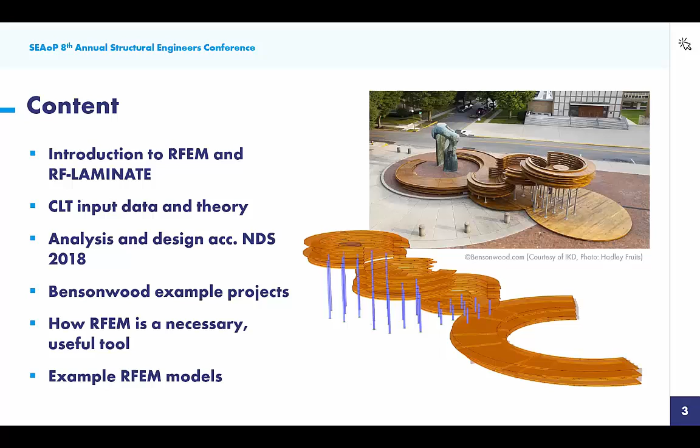I'll go through the CLT input data as well as some of the theory behind it, and we'll be running a quick analysis and design according to the NDS 2018. Then I'll turn it over to Florian, an engineer at Bensonwood, to show you real world applications of cross-laminated timber and mass timber with some example projects they've worked on. He'll talk about how they found RFEM to be a necessary and useful tool in these projects, and go through a few example RFEM models as well.

So I am going to go ahead and begin within our program RFEM. This is the main structural analysis program, RFEM. It will provide a full analysis, so we're talking internal forces, deflection, support reactions. We also work with this add-on module concept to provide design of our elements, and today we'll be looking at RF-LAMINATE, which provides design of cross-laminated timber.

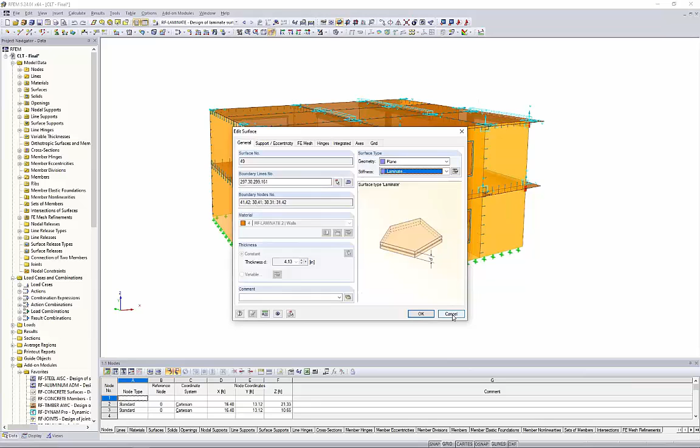For the sake of time, I've already modeled a two-story structure here, and you'll notice several surfaces. If I double click on one of these surfaces, the stiffness type is set to laminate, referring to our RF-LAMINATE add-on module, which we'll get into in a minute on how we can accurately calculate the stiffness properties of CLT panels. I've also combined this with member elements, so you'll see glulam beams dropped down below the bottom of the surfaces for additional support, as well as some glulam columns, all within the same project.

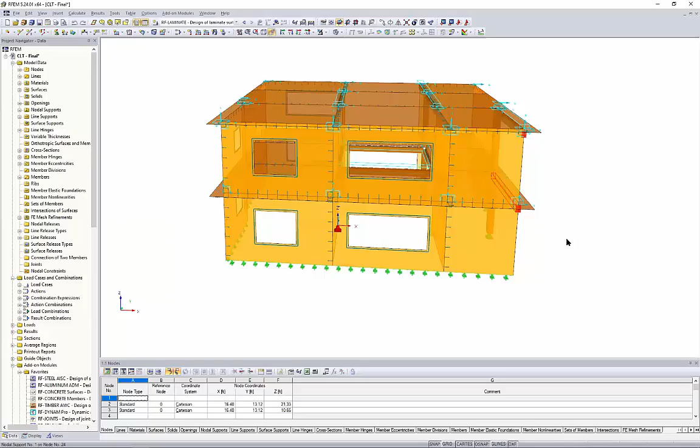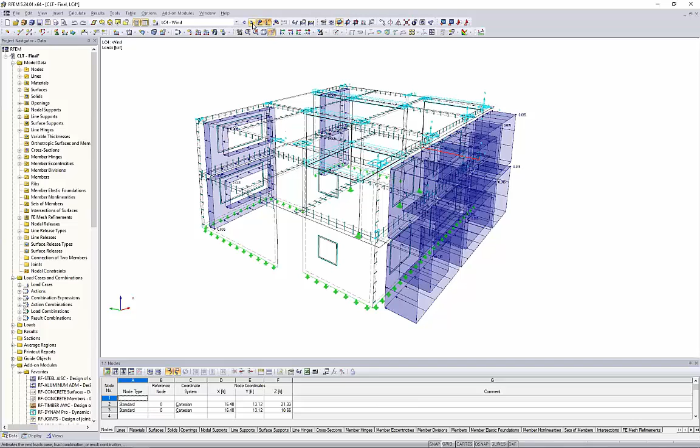I've also applied loads to this structure. These are just general surface loads. If I turn this to wireframe, it's a little easier to see. We have a dead load applied to the first level and the roof level, a live load, a simple snow load again applied at that roof level, and then a lateral wind load. I went ahead and combined all these load cases into load combinations according to ASCE 7. When we display these together, you'll see these gravity loads in addition to lateral loads acting on the structure altogether.

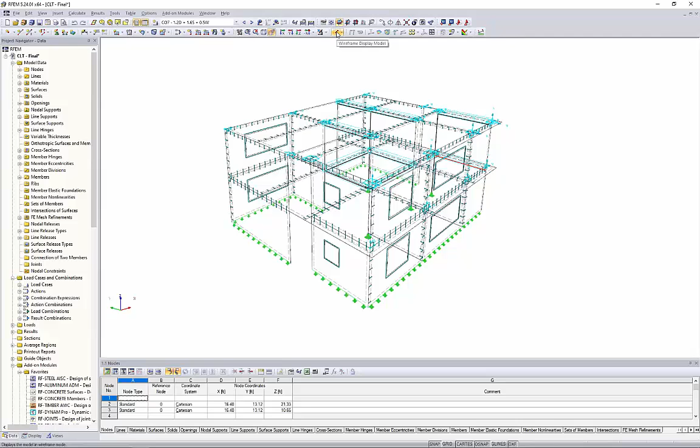Before we run this initial calculation, what's required is to define the correct stiffness types for our cross-laminated timber, and for this we'd utilize the add-on module RF-LAMINATE. I can access RF-LAMINATE within my project navigator on the left. When I say add-on module, it's really nothing more than this dialog box that pops up within our main program. So before I give you a quick tour, let's jump back to the PowerPoint to see what's happening behind the scenes with this add-on module, how it's working with RFEM, the main program.

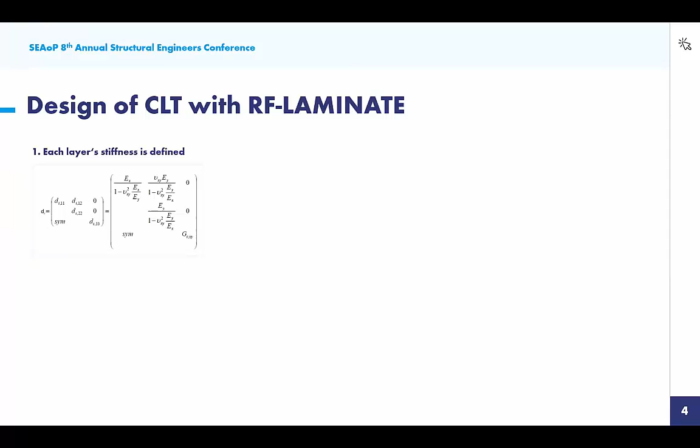We know with cross-laminated timber that this involves individual layers oriented 90 degrees to each other, and each individual layer has its own stiffness properties - modulus of elasticity, shear modulus. In turn, these individual layers have their own stiffness matrix as well. This is what we'll eventually be defining within RF-LAMINATE - these individual layers. What we do with these individual layers is create this overall panel, and what's required for this panel, which might be used for a wall or floor element, is to generate the overall stiffness matrix - what we call the global stiffness matrix of this panel.

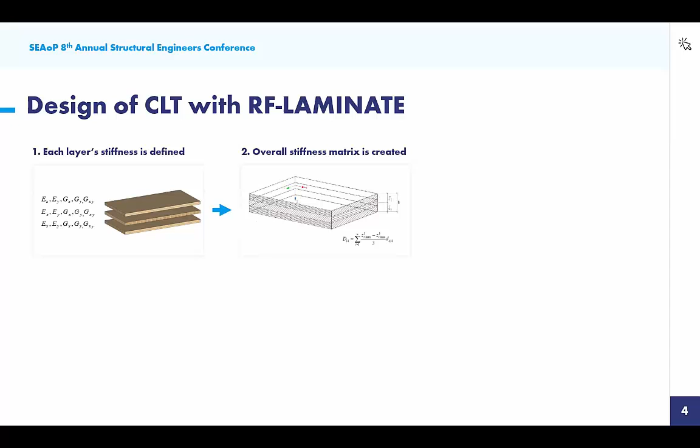RF-LAMINATE will automatically do this in the background with what's called the laminate theory. So you might see here a sample calculation for the D11 entry of that stiffness matrix.

We take this global stiffness matrix and export it from the add-on module back into RFEM, for that structure we were just viewing. Then we can go ahead and run the analysis, which includes the dead load, live load, wind, and snow load. After running this analysis, we get internal forces for each one of these CLT panels.

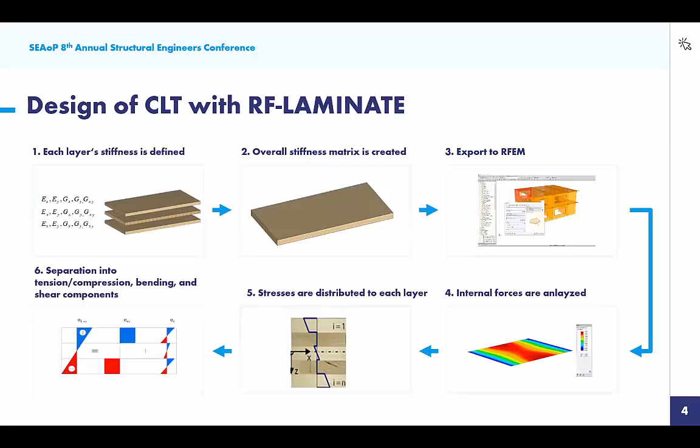These stresses from the analysis are ultimately what we're comparing with our design stresses, or our limiting stresses, based on the material as well as the NDS code. From this, we finally get a design ratio for our CLT panel. So that's kind of what's going on in the background here.

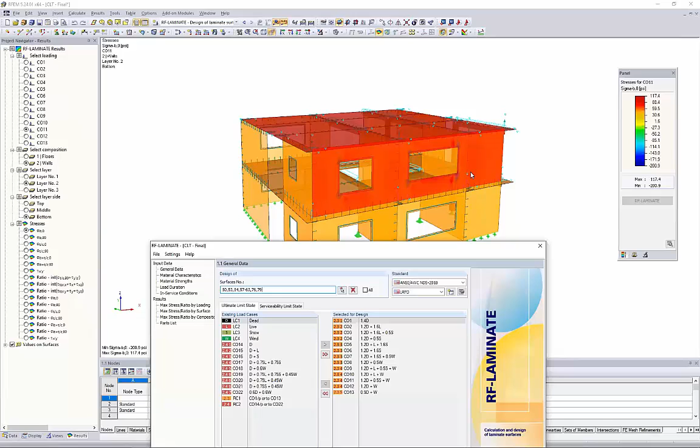Jumping back to RFEM, just to give a quick tour of what this add-on module requires for input, you can see that I can choose the surfaces I'd like for design. Currently I've only selected the roof panels here as well as 3 wall panels, but we could design all at once if we wanted to.

Over on the right-hand side, we're going to choose our design standard. You can see the NDS - we know recently the NDS has added CLT design with the 2015 standard, and we also have the 2018 standard. We have the Canadian standards, since that was recently implemented there, and then of course the Eurocode.

For the ultimate limit state design, we would likely move our LRFD load combinations over here to the right, simply because I'm choosing the design method according to the LRFD. Notice the ASD is also available here.

We can also check serviceability for these panels - we're talking deflection checks, and I'll show you a little later where we can set that limiting deflection ratio. For this simple example today I'm not doing deflection checks, but we'd probably move these unfactored ASD load combinations over to the right-hand side.

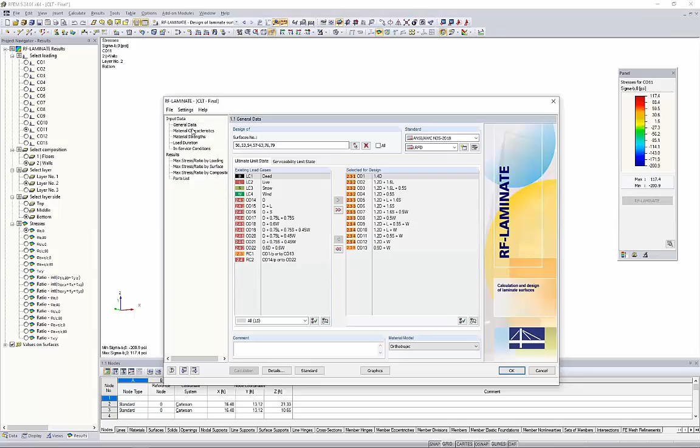It's really as easy as moving down these tables from top to bottom. So we'll take a look at this next table, material characteristics, and this relates back to the PowerPoint model of where we're defining these individual layers for our CLT panel.

For the first layer, we can access our material database and use our filters on the left to filter to timber. We might choose North America, and the NDS 2018, and here's about every single timber material available within the standard, along with all of the relevant material properties. You can use these search functions if you need to as well.

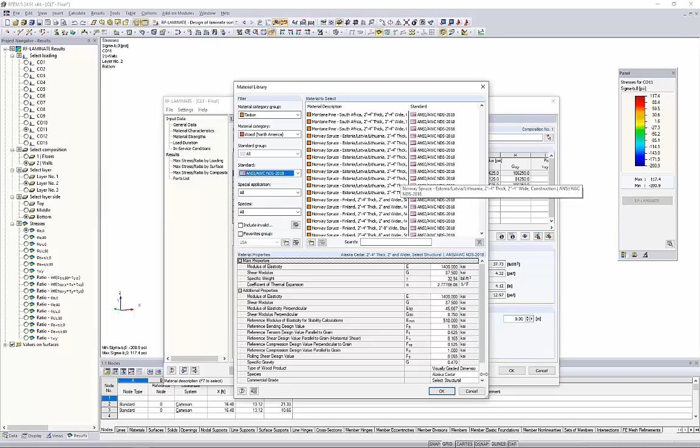Once you've determined what the material is for that first layer, we would select it. You'd want to input the thickness, and notice in this third column is the orthotropic direction - 0 degrees, 90 degrees, 0 degrees, and so on. That's the definition of CLT, orienting those layers 90 degrees from each other. Then we get the modulus of elasticity and the shear modulus automatically brought in from that material property database.

We'd continue to do so for our additional layers, and this might be for a custom layup, a custom type CLT composition. We could save these layers so we can always use them in a future project for mass timber within RFEM. The other option is to import the layers from the library.

Within this option you can see a drop-down box of various manufacturers. For CLT from the North American market, some names that might sound familiar are Nordic Structures, Smart Lam, Structurlam, and then we just have the general PRG 320. For example purposes, we might move forward with PRG 320 CLT according to the US.

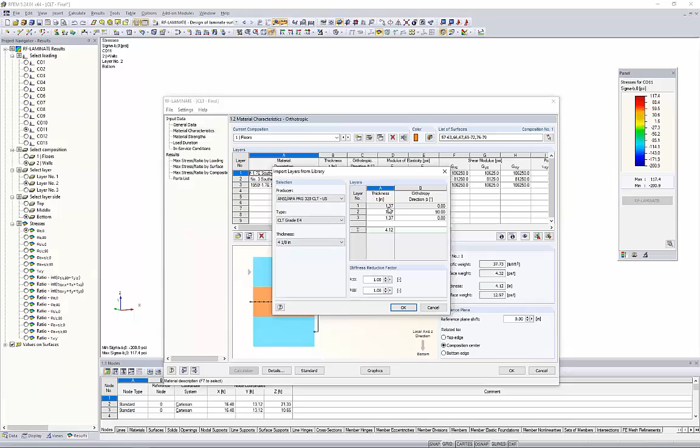So once we select our manufacturer, we would choose our grade from the drop-down, then choose our thickness, which influences the number of layers for our CLT panel. Notice the layers are automatically brought in, including the thicknesses and directions. When we import that in, this entire table is filled out for us based on the manufacturer's products. So that's just another option if you see your manufacturer in there. Otherwise, you can create custom layups and save them to your library.

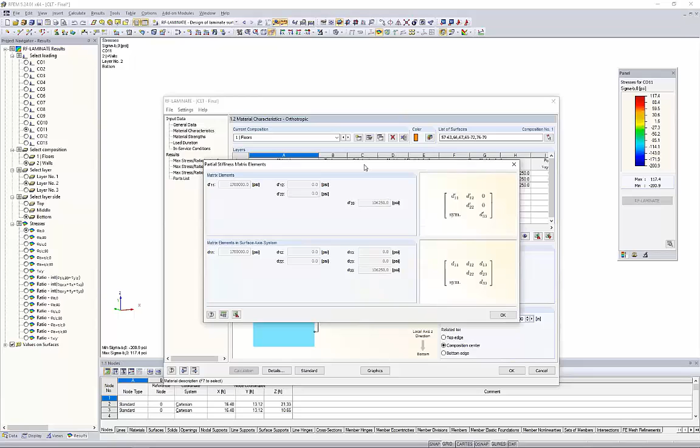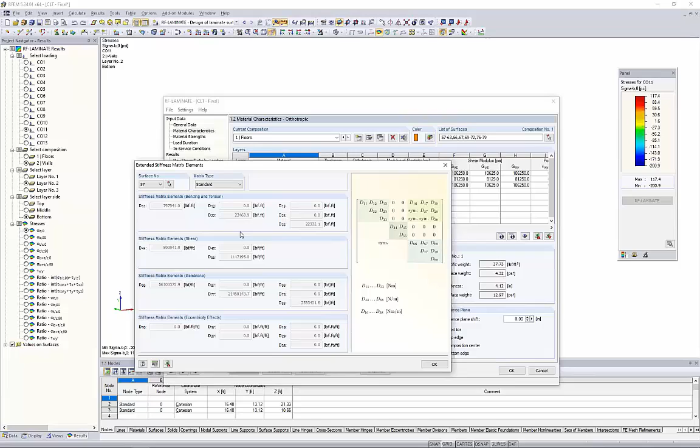Now, relating back to the PowerPoint, each one of these individual layers has its own stiffness matrix, so we can view the individual stiffness matrix here for that single layer. The program takes it a step further and calculates this global stiffness matrix for our panel. If you're not using a program where you can individually define these layers, you'll need to put the global stiffness matrix into your relevant FEA program. This might be something you get from the manufacturer, but ultimately this is the information we need to export back out to RFEM.

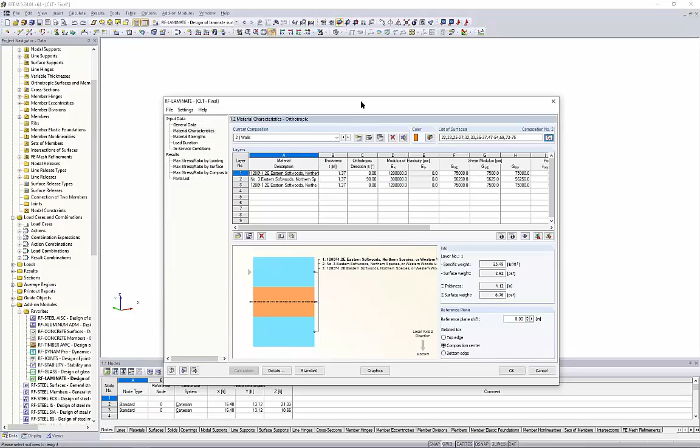You can see here that I named this composition 'floors', and I've applied it to all of my surfaces that are floor elements. We can create different compositions for the roof versus the first floor - that's all possible. Exact same concept for my second composition here, my wall elements, and this time I also have 3 layers for my wall elements. Perhaps we have 5. You can see I've applied these to all of my wall elements back in the RFEM model. So before we move forward, there are some details within these compositions that are really important for analysis.

We can visit those under the detail settings here. You'll notice we have several options that we can check on and off, as well as stiffness reduction factors. So in order to discuss this a little bit further, I'm going to jump back to this PowerPoint.

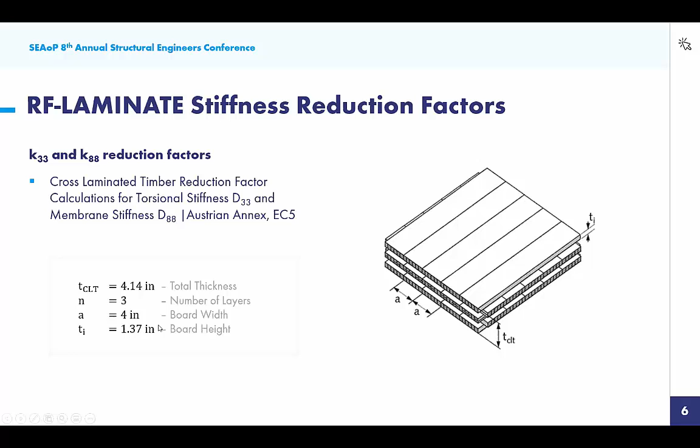This is the information we apply directly in the program under those composition details. Same concept for K88 - we're going to apply those directly here. Now, for some of the manufacturers, these values are included if they don't have edge bonding. For others, maybe we weren't able to get this information. So always just something to double check for your particular project, your manufacturer, and which CLT panels you're using. And again, not specific to RFEM, but this would be a stiffness reduction you'd want to apply with your own analysis tools.

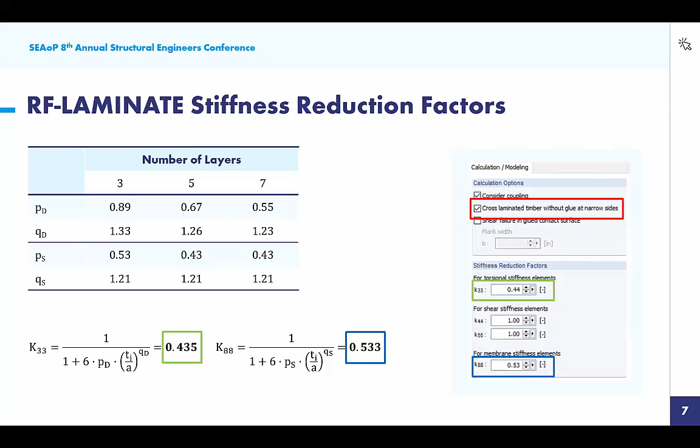The final consideration here for these check boxes up at the top is shear failure in glued contact surface. And this actually all relates to torsion. We're really mostly concerned with torsion when we're talking about CLT wall elements loaded in plane. We're probably not so concerned with torsion when we're talking about floor elements, for example. Now, this really is also only a concern when we don't have glue at the narrow sides again. So this first checkbox must be checked. That will make this third checkbox available here that we can go ahead and take a look at torsion considerations.

Just a small tip, it's really important to set the FE mesh back in RFEM. So our FE mesh settings for the length approximately equal to the board width - in our case, that would be 4 inches - just for the most accurate analysis.

Now, once again, the NDS standard, the CSA standard don't address torsion whatsoever. So we refer back to the Eurocode 5, the 2010 version. I think we're all kind of in agreement that the European standards have been doing cross-laminated timber much longer than what we've seen here in North America. So it's pretty safe to say we can refer back to these standards for considerations such as torsion.

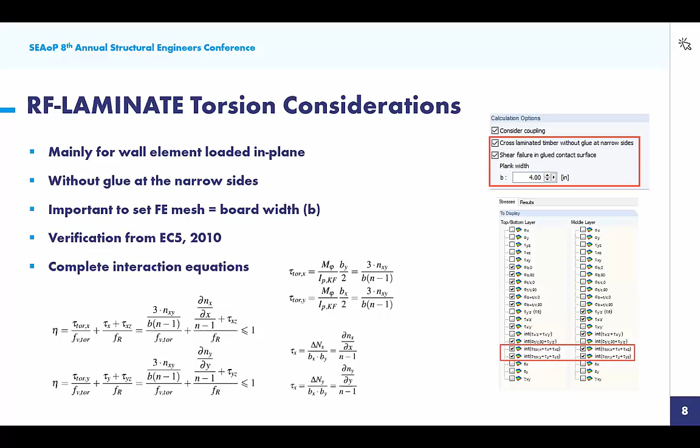Now, over on the right-hand side, you'll see that we have all of these different stresses available to us within RF-LAMINATE, and it's pretty overwhelming. So what we've tried to do is to just only check on the check boxes that are relevant for CLT design. Now this includes the top and bottom layers as well as the middle layers, and torsion is actually not one of them that we have checked on by default. So I'll show you in just a minute how we can go ahead and turn those on in order to take that into consideration for our results that are being shown.

So we'll go back to RF-LAMINATE. If you remember, we still have this dialog box open, and we're currently looking at my wall elements, and we are considering coupling. We don't have glue at the narrow sides. We are concerned with torsion, so we want to put in our plank width or board width equal to 4 inches. And just like I showed in the PowerPoint, I calculated K33 and K88, which I'm inputting in here as well.

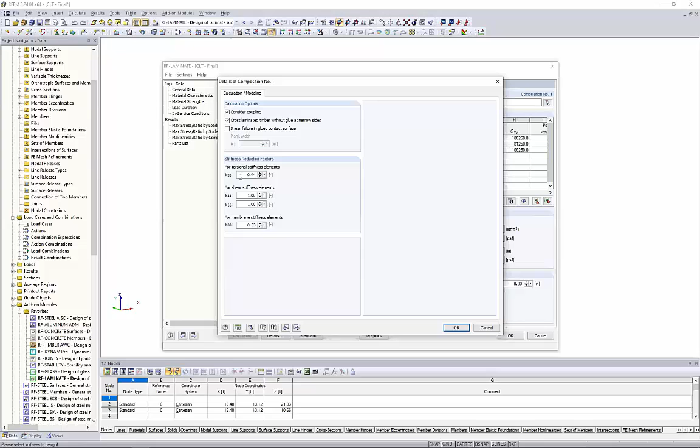So for my floor elements, same exact concept, but I'm not concerned with torsion here, so we can leave that option checked off, but we're still applying that stiffness reduction factor K33, K88. Once we've input all this information for those material characteristics, we can jump down to our next table, material strengths.

Really not much to do here. Everything is brought in from that material library. It's just showing us the strengths for bending, tension, compression, and shear. So this information, based on the material properties in addition to the NDS factors, is what's going to give us our limiting stress values.

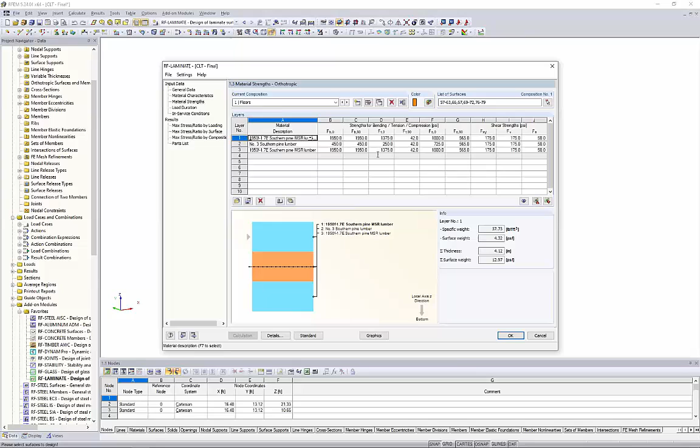When we're talking about the NDS factors, we might be looking at the load duration factor, which we can see is set within this next table. So dead, live, snow, wind, we would set the load duration factor here. In-service conditions: is your CLT panel dry? Is it wet? What temperature is it sustaining? All of these factors are actually found under the standard tab, where we can see the relevant factors that are going to be applied for design purposes.

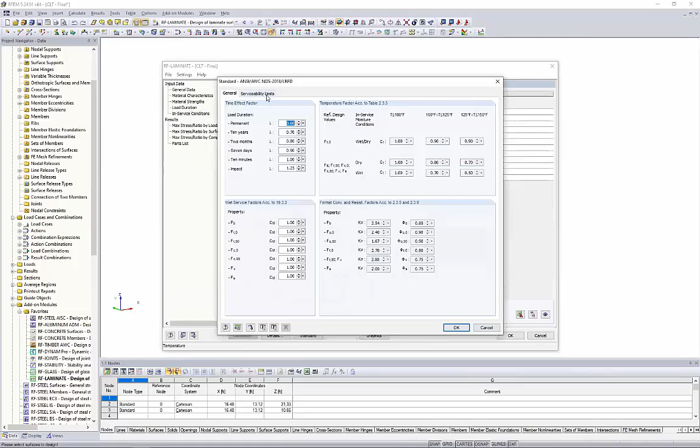You'll also notice the second tab here, serviceability limits. That's what I was talking about - we can check deflections where we set this limiting deflection ratio directly within the program. We're not checking serviceability today, so this isn't applied, but just to let you know it is available.

So before we're ready to run our calculation, remember I wanted to turn on the torsion checks, so we can do that under the detail settings. Here's this long list of all these different stresses that we can compare and give design ratios - way too overwhelming. So we have just the default settings here, which likely is going to be most relevant for your CLT design. But here in the lower portion is where we can activate the torsion checks as well.

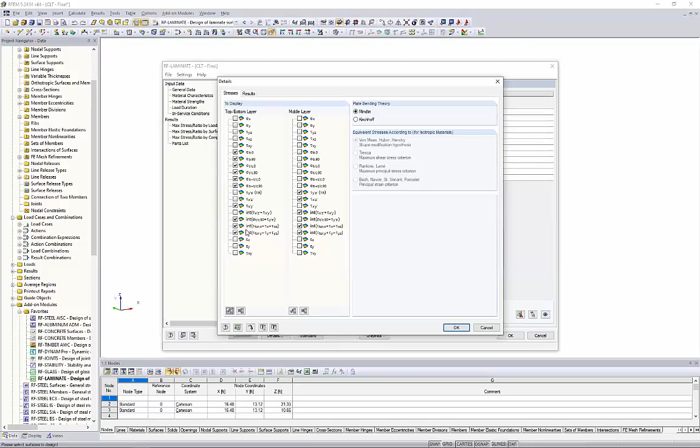So we're almost ready to run that calculation, but before we do so, let me jump back to the RFEM program. This is just our main structure, and you'll notice we have all of these blue symbols shown everywhere. So we might be wondering, what are these used for and why are they relevant? Again, incredibly important for the true properties here of our CLT structure.

So let's begin with a couple of adjacent panels, and I'll highlight these and we'll take a look at just the visibility by these selected objects. So two CLT panels side by side, and I'd say in most FEA programs when we're modeling two surfaces side by side like this, the program is going to assume that we have a fully rigid connection between these two panels. And we all know with CLT design that that's not the case. Rather, we're going to be utilizing some type of screw connection, where we have this partially fixed connection, but definitely not a fully rigid connection. That's why we would utilize in the program what's called a line hinge.

So when I double click on this line hinge, you'll notice I have the ability to fully release the moment between the two panels. That's probably one consideration we want to take. We also have the ability along the joint length to set some type of spring constant, and this might be for the slip of those screws between the two panels. For my example today, I set this to 50 kips per square foot, but this would all be relevant to the type of CLT connection you're using for your projects. The other 2 degrees of freedom, translation in the Y and Z direction, are left at fully fixed.

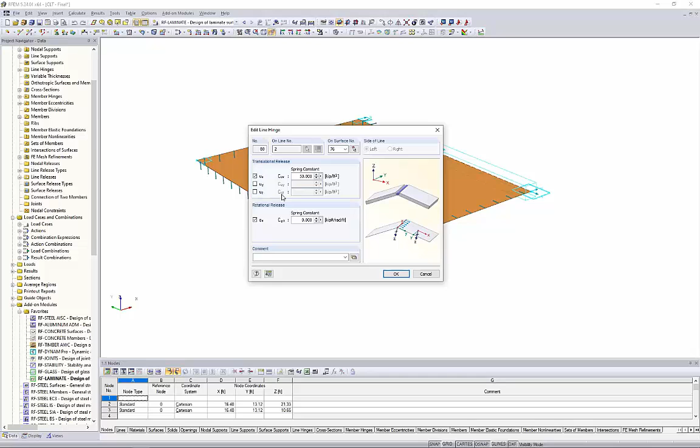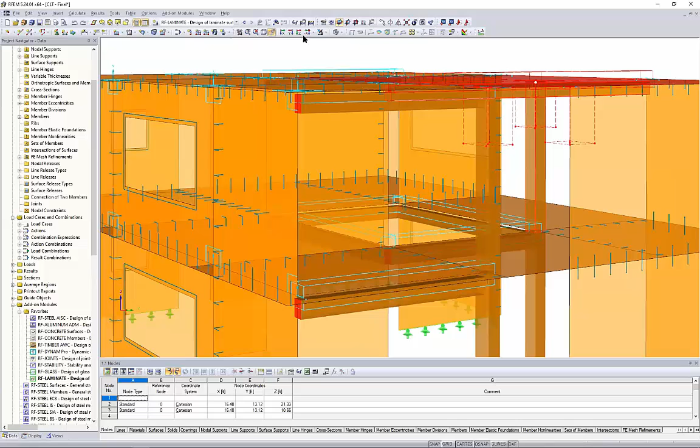So this is definitely something you need to apply, and this is why you're seeing, when I cancel out of this visibility mode, these line hinge symbols shown everywhere throughout the panel connections. The other symbol we're looking at here are these long blue lines. For this, let me go ahead and create a user-defined visibility here, just so this is a little bit more clear.

Similar to our adjacent panels, we have these beams drop down below the CLT panels just for additional support, these downstand glulam beams. Very similar to what we're seeing with the CLT panel connection when they're adjacent to each other, this is going to assume a fully rigid connection between this beam as well as the CLT panel.

Once again, we know that's not the case because of these screw type connections. So we need to adjust this fully rigid connection here, and we do so with what's called a line release.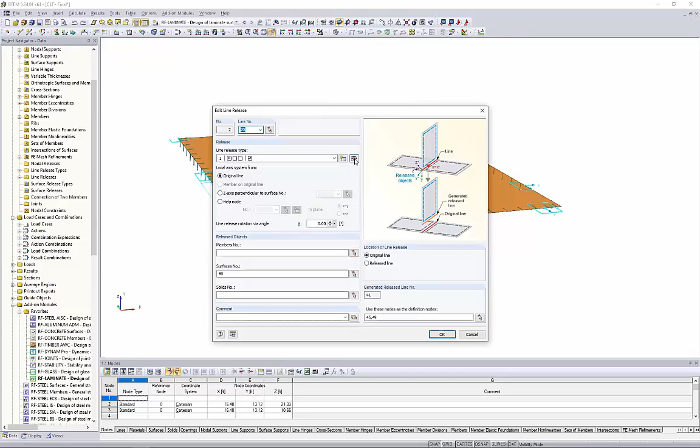When I double click on this line release, it's actually very similar to a line hinge, just a little bit more applicable to beam to panel connections. With this, we can define the line release type by releasing the moment, and we're also going to apply that stiffness slip to the joint along the local x-axis of the line here, so 50 kips per square foot. The other two, we kind of leave these as fully fixed.

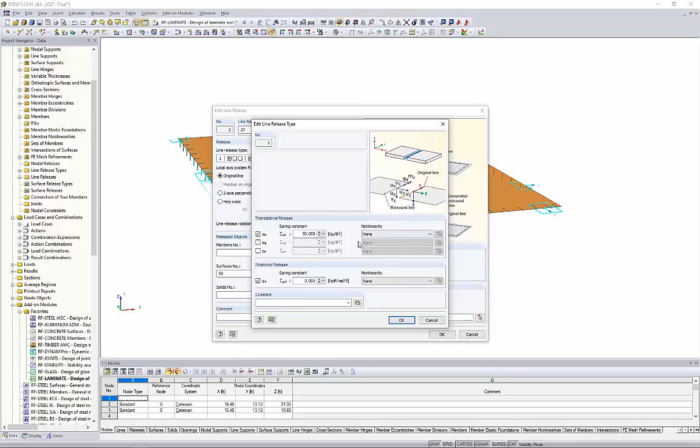Now, another advantage of a line release over a line hinge is the ability to define nonlinearity, so you're going to see here friction, partial activity, and so on. Where this might be relevant is in the vertical direction. Maybe we have a scenario where we would like full force transfer when we have the CLT panel bearing down on the member, but in the event of uplift, we want that to be completely released. So that's all possible with these nonlinear applications here.

So that's kind of why we have these definitions here, these line releases everywhere where we have a beam kind of connecting to the panel above it.

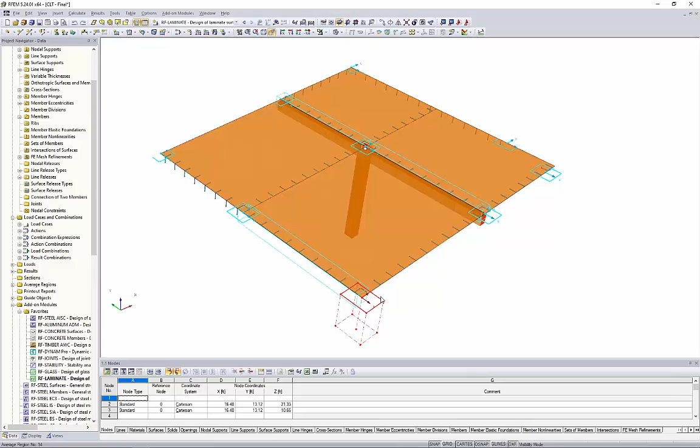Now, the final application here, which we'll notice, is these rectangular blue squares. Well, these are going to be used for singularities. And where might we see a singularity?

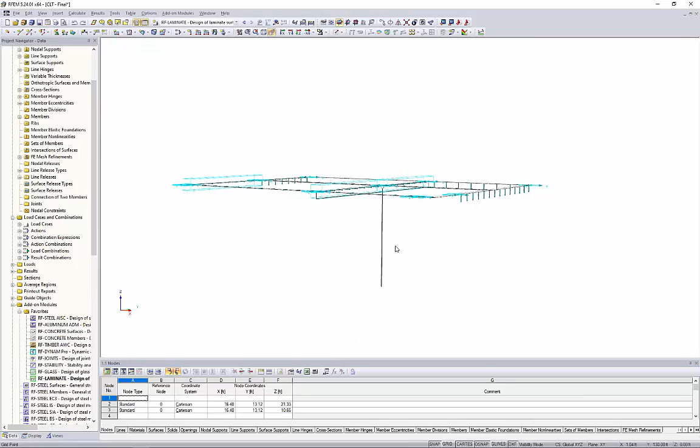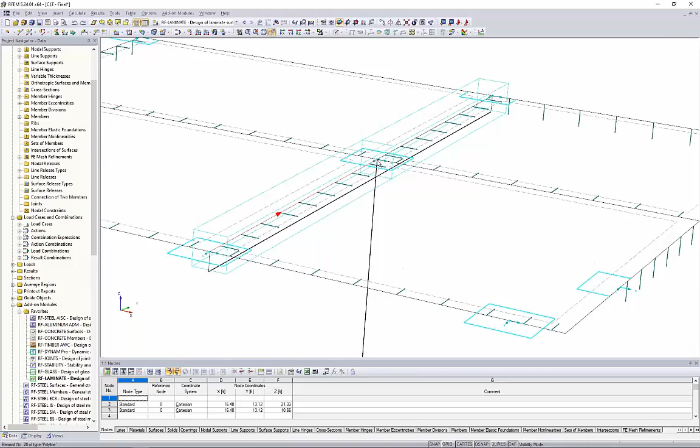Well, we convert this to a wireframe view, and we know from general FEA programs, and this is true not just for RFEM but for all programs, that members are represented here by single line elements at their centroid. So this column is just a single line element, and it's framing into these 2D surfaces at this single tiny FE mesh point here. So you can imagine the amount of stress or internal forces and this huge spike that we're going to see at this single FE mesh point, just simply because we don't have great load distribution. So again, this is not unique necessarily to RFEM, but singularities happen in all FEA programs.

So you're going to have to find some approach or some way to really level out those singularities. Well, in RFEM, we can apply what's called an average region at these locations. So an average region is exactly what it sounds like.

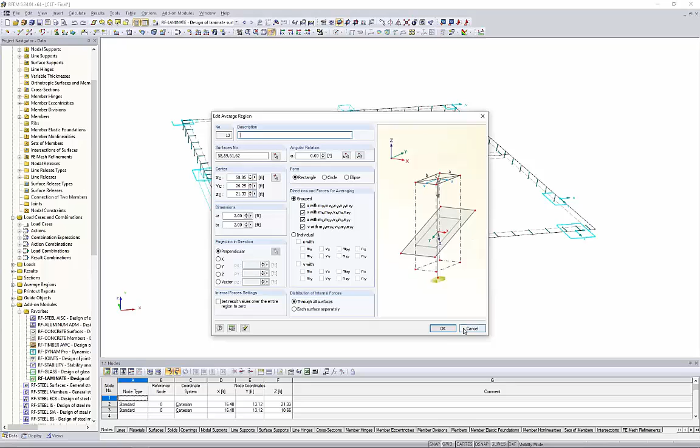It's going to average out the forces over a specified dimension, so I've set here 2 feet by 2 feet. I'm averaging out the forces in all 4 directions, and we can kind of smooth out those high peak forces, internal forces and stresses that we know aren't going to exist in a real life application, but they're not really avoidable when we're talking FEA design.

So that would be another application here of why we kind of have these average regions shown within the structure. Canceling out this visibility mode, that will go ahead and explain why we're seeing all of these blue symbols everywhere. Now, these average regions can be taken into consideration within the add-on module RF-LAMINATE as well.

So once we've applied all these line hinges, line releases, average regions, if they're necessary, we're finally ready to run the calculation. So we'd hit calculation here within our add-on module, and we're presented here with our results in table format. So we can view the max stress ratio by surface, for example.

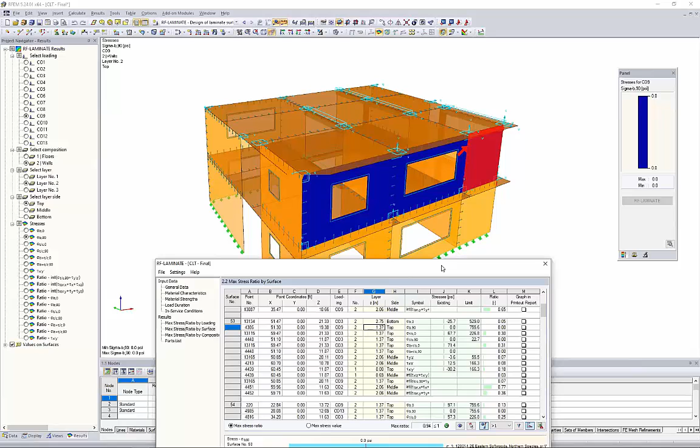If I kind of pull this down here, you'll notice that as I'm scrolling down through this table, everything's synced up in the background to highlight the surface that I'm looking at. Maybe a little bit difficult for you guys to see, but there is a red arrow here pointing exactly to where my controlling stress point is for that particular check. So that's a nice feature if we're just kind of trying to see relative to the table, to the structure in the background, where exactly we're at.

Taking a look at the actual data presented in this table, we're going to see each individual surface in each one of these categories, the bending stresses, tension compression stresses, combined bending tension compression as well as shear. This does include rolling shear checks as well.

And remember those torsion checks that we've also activated. Within column J, we're seeing the existing stresses purely from the analysis - bringing in these stresses and separating them out to each layer into bending, tension, compression, and so on. Column K is the limiting stresses, based on the material as well as the NDS standard and those factors being applied. Ultimately in column L, this is where we're getting our design ratio.

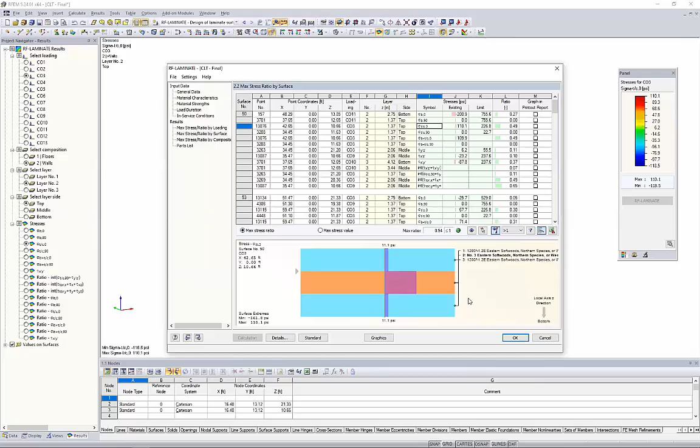We can go ahead and filter this information, export at the click of a button to Microsoft Excel if we need to sort further. But ultimately, we're seeing a max ratio of 0.94 for our example today. We have our green smiley face because it's less than 1.0. As I talked about in the PowerPoint, the stress distribution for each of the layers - we can see those stress distribution diagrams shown here as we click through all these different applications.

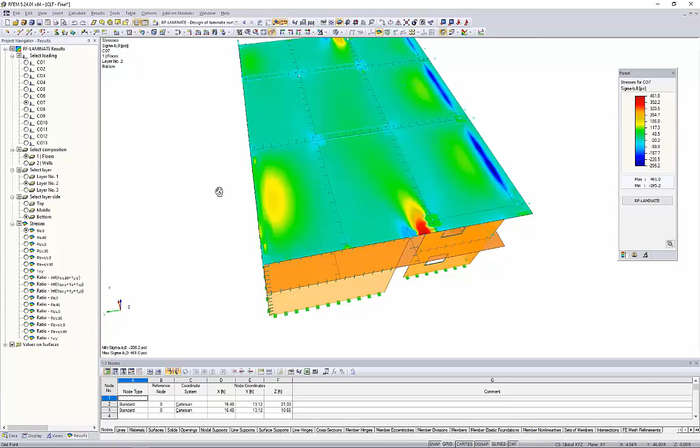For each one of the surfaces, in addition to all this information being shown in table format, we can always jump to the graphics view. This is the results from RF-LAMINATE, selected here within our drop-down box, viewed graphically back in RFEM. We can scroll to the different load combinations if we're interested in those results. We can take a look at our wall elements, but we can also switch to our floor elements.

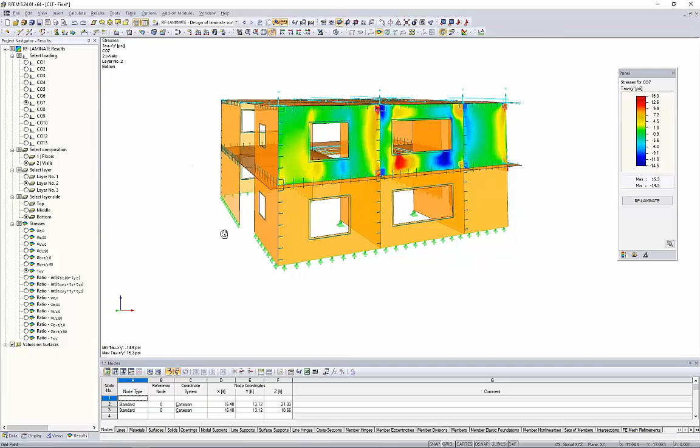With these additional options, for our floor elements we might be interested in the bending stresses, for example. We can also take a look at the tension compression forces, and shear is something we're also considering. Jumping back to our wall elements, we're probably most interested in shear, but things like tension and compression are also shown available to us. And of course, we can view the design ratios in color formats as well.

So we can print off these pictures into our printout report and take a look at the results in just something other than table format with numbers.

Hopefully this was just a quick introduction to CLT design. Some of the information to take away from this first part of the presentation into your own programs or design methods is consideration of that global stiffness matrix - do we need to reduce some of the entries such as D33 and D88 if we don't have glue at the narrow sides? And then also back in the RFEM model, things like line hinges to make sure we don't have a fully rigid application between adjacent surfaces, line releases, and so on.

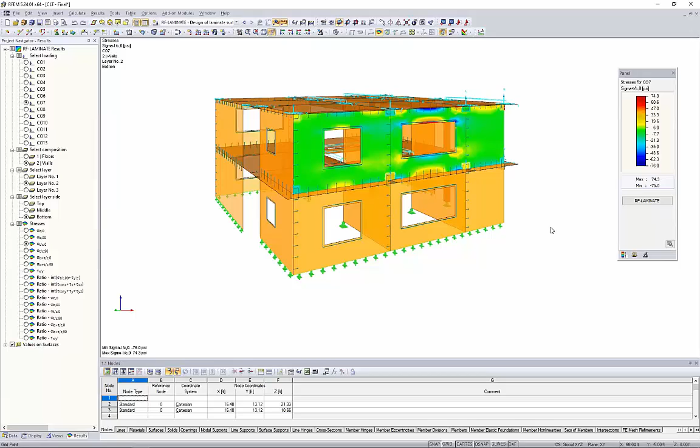So with that said, I will go ahead and turn it over to Florian for the second part of today's presentation.

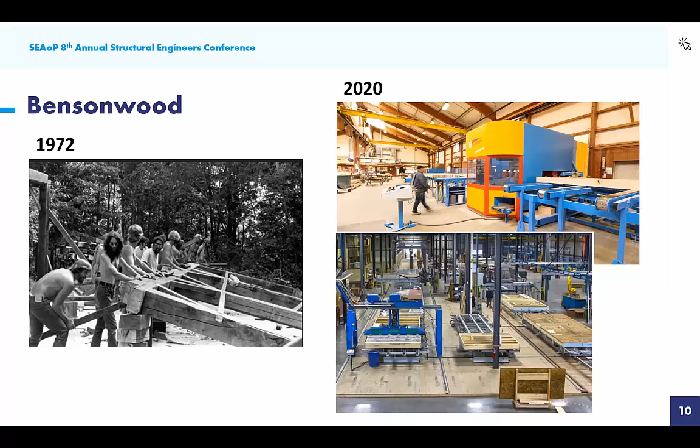The lower picture is our panel shop that we opened in 2017. Again, it's highly automated. The panels get built, and they get transported through the shop on some kind of car, and they just move along. The nailing is automated, and on the left you can see where the cellulose insulation gets filled, and then a little later in the shop it gets put upright, windows get installed, and that's what it looks like today.

All right, enough about Bensonwood.

This is the first project that I wanted to show. This is called the Conversation Plinth. It's more of an art project than it is a building. It was open to the public - you were able to walk on there, and you could stand on top. But it was just a temporary construction. It is CLT, and it's not really protected - it's outside, so it was just a temporary installation.

But of course, it had to be fully calculated because people were using it. The project is made out of hardwood CLT, which is pretty unusual. But there was an initiative in Indiana to promote the use of hardwood, locally grown hardwood, and so they came up with this installation and came up with a custom layup of a hardwood CLT.

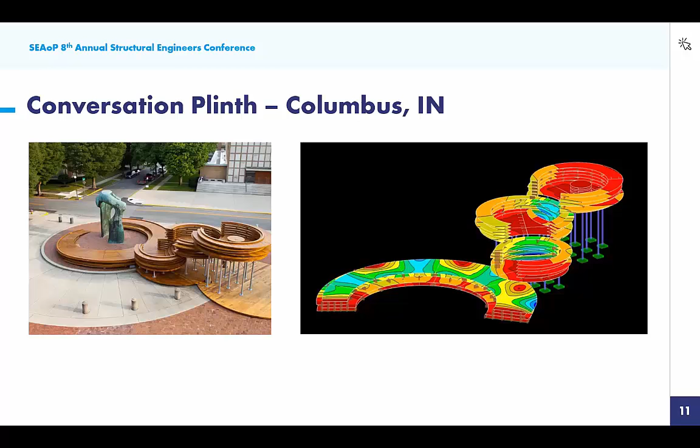All right, I think that's it about that project. The next project I would like to talk about is this Haus Gables in Atlanta. The architect on this is Jennifer Bonner.

When this was designed, she had in mind to really celebrate the use of CLT, as you can imagine. So everything in that building is basically CLT.

The walls, the roof panels, the floors, partition walls, even the guardrail for that balcony—she was really trying to use it as much as possible and test out what's possible to do with this, well, somewhat new material, I guess.

There are no beams in this roof structure or in the floors. It's all CLT floors that support themselves, and then there's some walls. But especially in the roof, you can see how this could be utilized.

The only steel beams are in here. You can see those too, because the span was a little too long and the wind deflection didn't quite check out. There's no floor behind this.

We didn't want to increase the wall thickness just because of that one situation. So we have two steel beams in there, but everything else is just CLT panels.

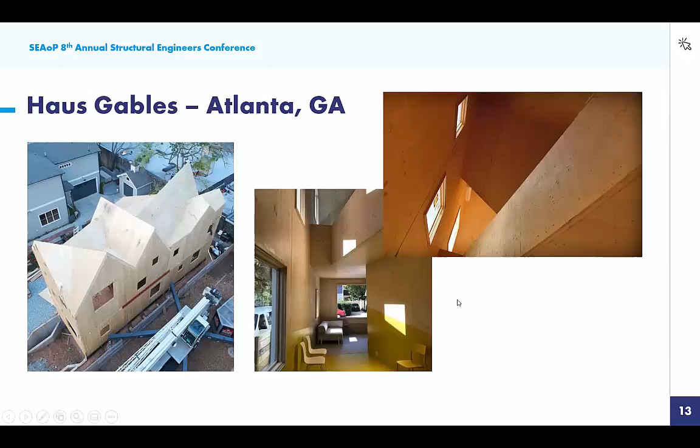This is a project on Long Island, and it was a collaboration with Lake Flato, the architects.

What we were trying to do here—maybe I'll skip a little bit ahead—is this centerpiece.

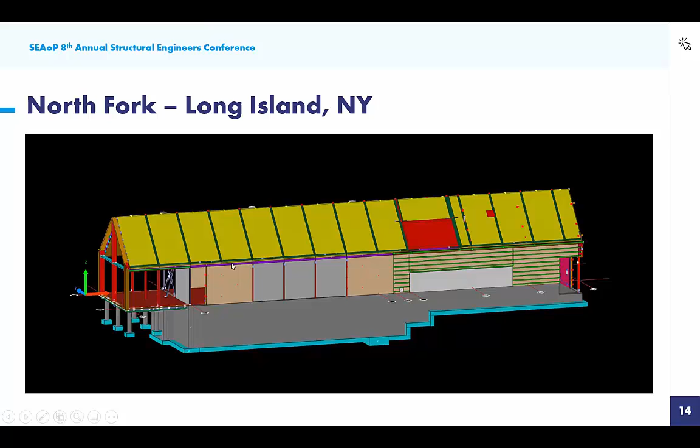From here to about there, there's no floor inside, and they didn't want any tie rods in there. Moment frames didn't seem feasible, and spanning a ridge that long wasn't really an option.

They just wanted to have one great open space. It's about 50 feet long, and so what we came up with is using the roof, using a CLT panel.

That you can't see in this picture, in the roof, stitching them all together and creating this as a deep beam diaphragm. So you wouldn't need any tie rods or moment frames.

There are just these braced frames at the end to take all the wind load and all the outward thrust that otherwise needs to get resolved from here to the end.

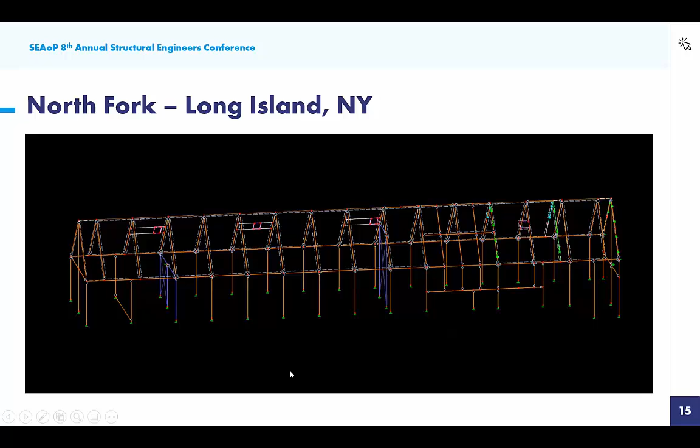This is the cadwork model that we used, and then this is the RFEM model. For this project, I'm actually going to switch over here. So that is the actual model.

I did also work on that, so I can talk a little bit more about this one. I'm going to open one of those panels.

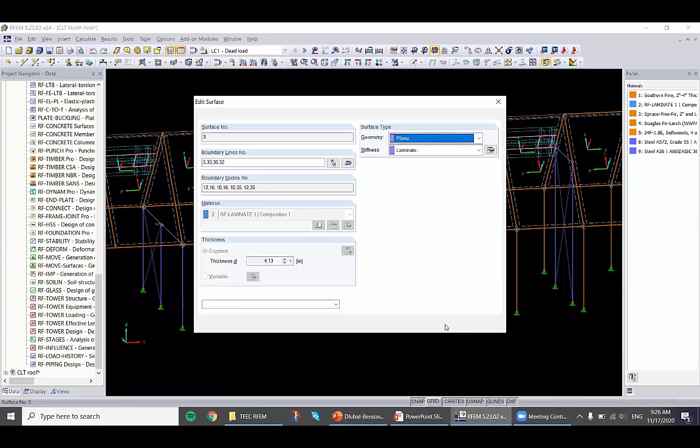As Amy explained earlier, we're using the laminate module here. So the whole built-up is defined in the other module. I'm opening this to show how those hinges work.

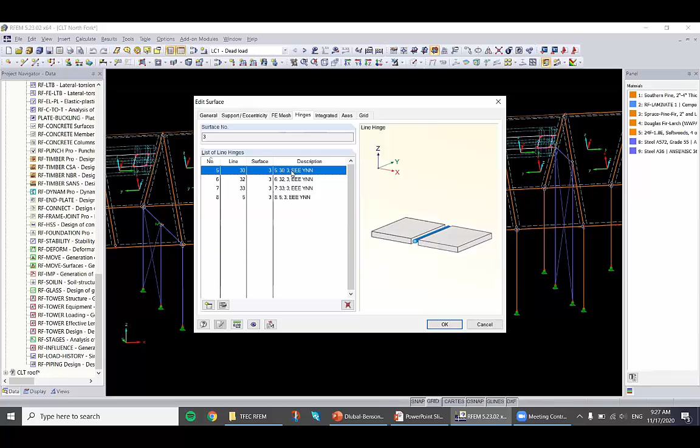So there's, on all four sides of this panel, there's hinges defined, and then the rotational release is always...

Set to 0 because obviously there's no moment connection there. And then we went so far to define all 3 of the other connections with springs.

This is a bit of a process, but it's very important to get right because it has a lot of influence on the stiffness of the whole building and deflections. The way we did it here is we would build the model with all this set to infinite stiffness, then run the calculations, look at the forces, and come up with a screw size and spacing that would work.

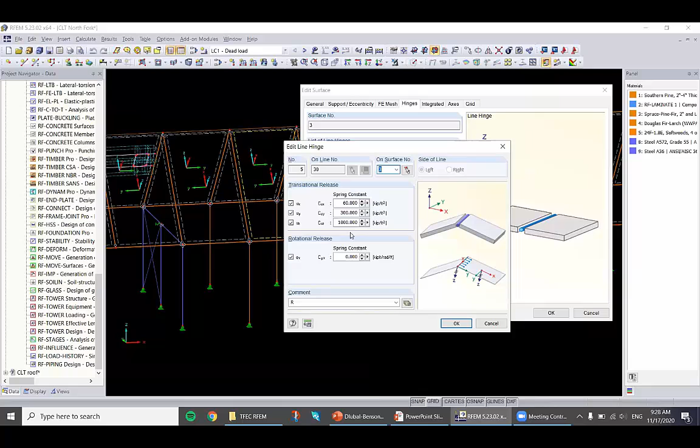Then we put this into an Excel sheet, looked at the stiffness that would provide, and put that stiffness into those boxes, running the calculations again to see if the deflections and forces check out. We do this for a couple of iterations until we're happy, until we don't feel like there's a ton of screws, even though there are a ton of screws, and the deflections are still acceptable.

That kind of process needs to get done for a lot of those connections. This one here is different because we're collecting a lot of the load along this one where the braced frame is. I'm going to show some results.

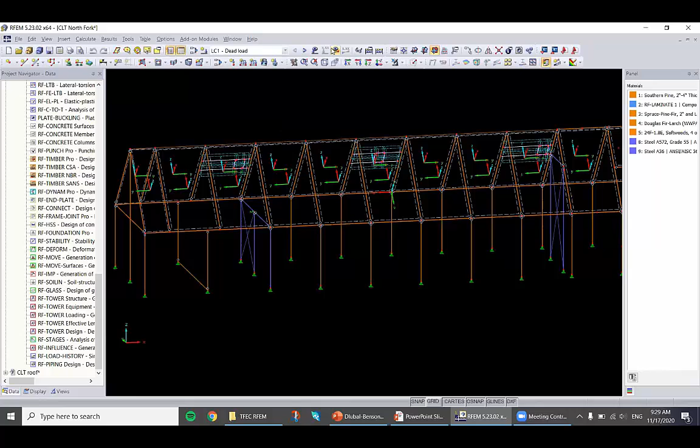What I found most interesting is the deflection of this. That was our main concern. You can see it's on Long Island on a bluff, so the wind loads were pretty significant.

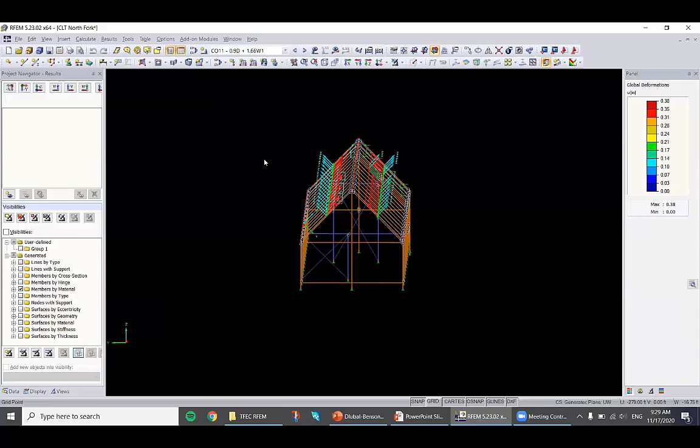Unfortunately, there's no results for this one. Yeah, so you can see the results here. We analyzed the whole building as one model, which we usually don't do, but in this case there was just no way around it. You can see the drift we're expecting here is about 3/8 of an inch, and that's also what we wanted to limit it to.

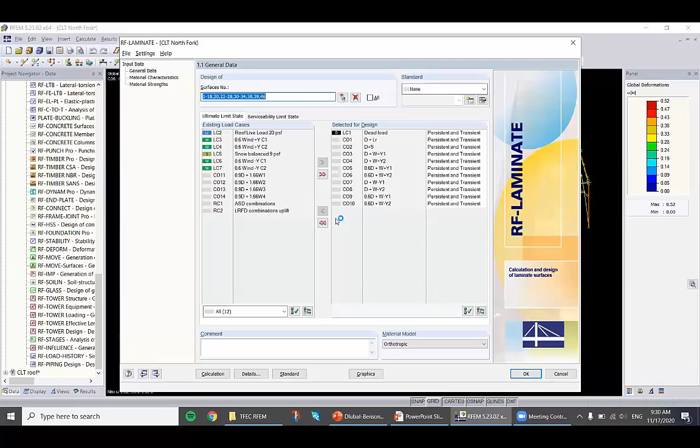I'm going to jump real quick into the module. Amy was talking about that before. I'm just going to go over this from a real-world example that is standing in Long Island as we speak. So what we used is Nordic CLT in this case.

It's from Quebec, Canada. They use black spruce, often in very small dimensions. They have very small trees, but they glue it all up into big beams and CLT panels.

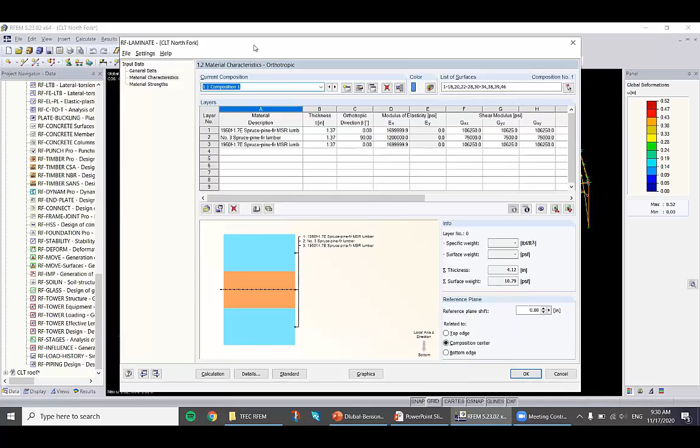In this case, we weren't so much interested in the actual span capacity. There were rafters in the roof, as you saw in that one picture, so the span wasn't the main focus. It was more focused on building this into a nice diaphragm, so a simple 3-ply was good enough.

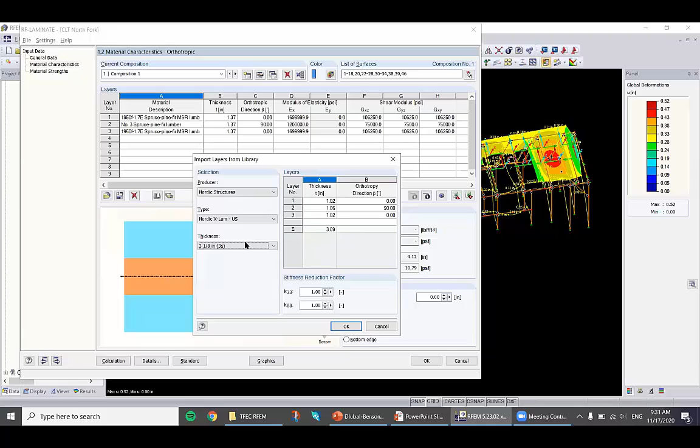It's very easy to import this. Nordic CLT is built into the program, so you just pick your manufacturer, and the type is US. They only have one type really, and then they offer different thicknesses. This is not what we used, that's a 5-ply, let me check that. Actually, this is the one we used, the 4 1/8. Then if you click OK, it just imports it. I'm not going to do that because it will delete the results if I do.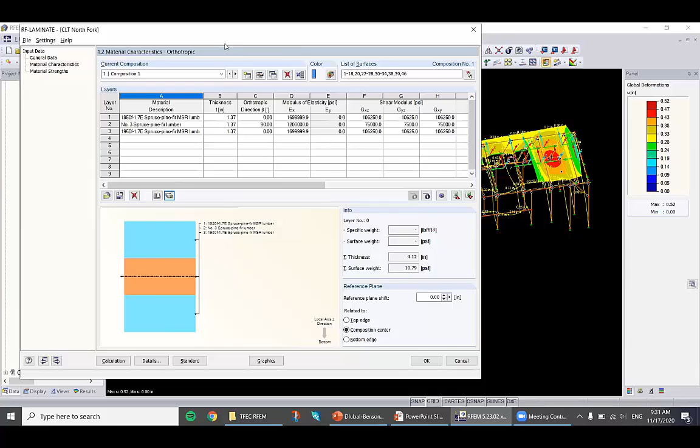Yeah, so that's how that module works. I don't have results in here right now to show. I'm going to go back to the presentation.

That's what it looked like on site. You can see the CLT here, those are the actual CLT panels. They were on the inside, insulation was on the outside.

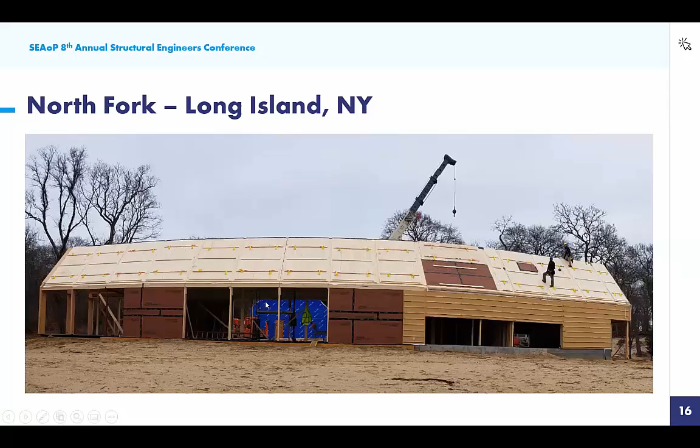Yeah, and that's the great open space that they were looking for, and that we were able to achieve without the use of too much steel, and definitely without moment frames.

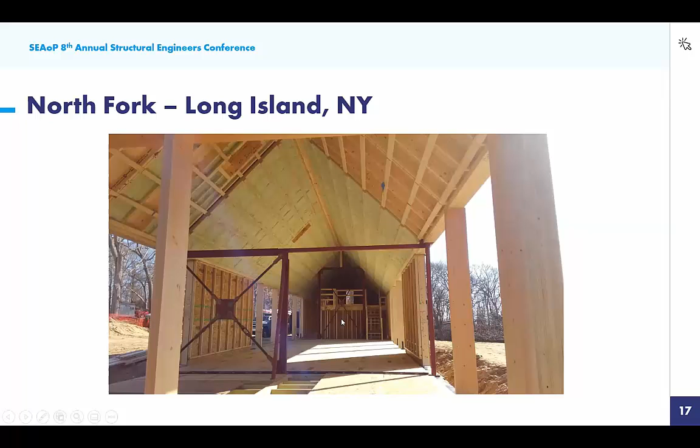Someone might ask, why would you need CLT for that? That's a good question. It's not necessary, it could have been done with sheathing as well, but I personally wouldn't have felt comfortable doing something like that with just, I don't know, 1/2-inch OSB sheathing. The forces were pretty high, and I don't think that would have been a good solution.

This is another project, we never got to build this one, unfortunately it was just a concept. It's in Washington D.C., and the architect was looking for some kind of a folded roof structure that was self-supporting. This is the CLT, the RFEM model.

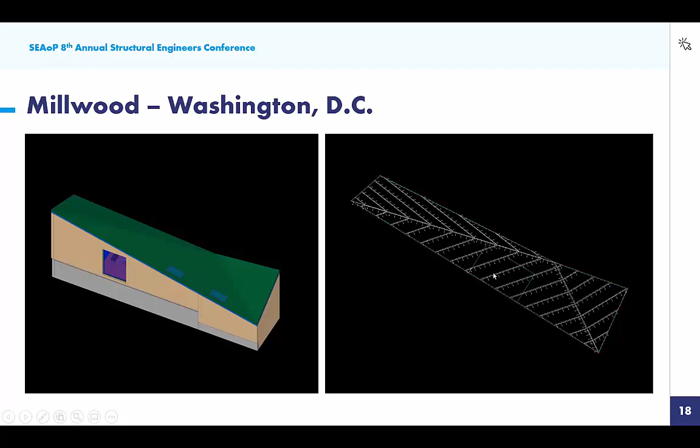We decided that CLT would be the easiest way to do this, again due to the biaxial bending capacity and the high shear capacity.

So we were able—sorry, I should mention, there's support all the way around, and then there's these two interior supports that we couldn't do without. There's a wall here, and then two more walls over here that hold up the roof. But everything else, there's no other supports in there. And we were able to prove that it's possible to do this with CLT panels.

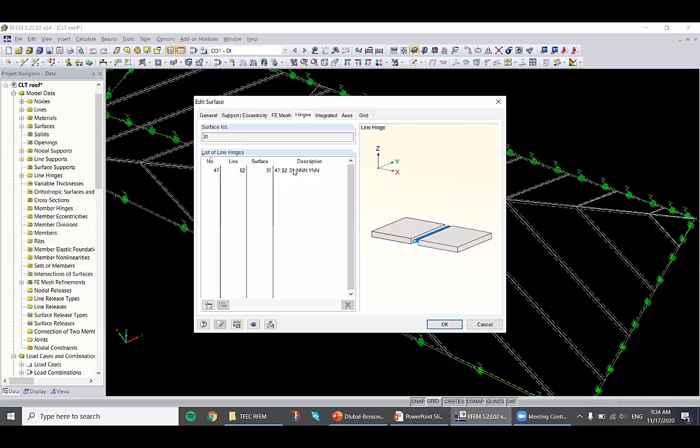It's essential to break up the model into actual panels, like the actual panel width, so that you can model the edge correctly from one panel to the other. Since this was only a concept, we did not go so far as to define the spring constants for the connections, but we definitely created a moment hinge at the panel seams.

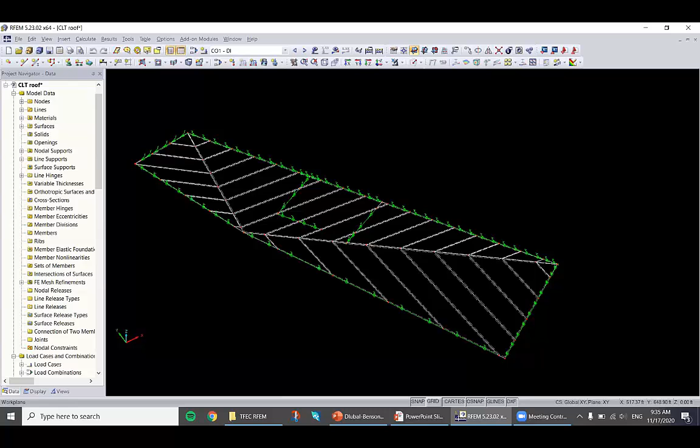Again, there's no beams in here. It's just supported by the exterior walls and those two interior walls. I'm not sure how to do this without an FE software. Maybe it's possible, but it's definitely way easier to do something like that with a program like RFEM, where everything is predefined.

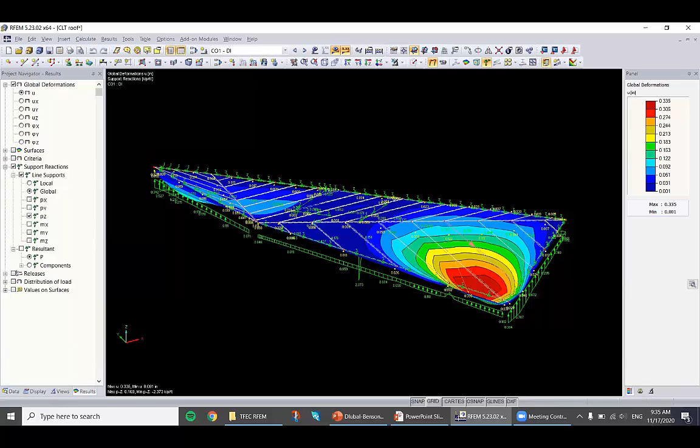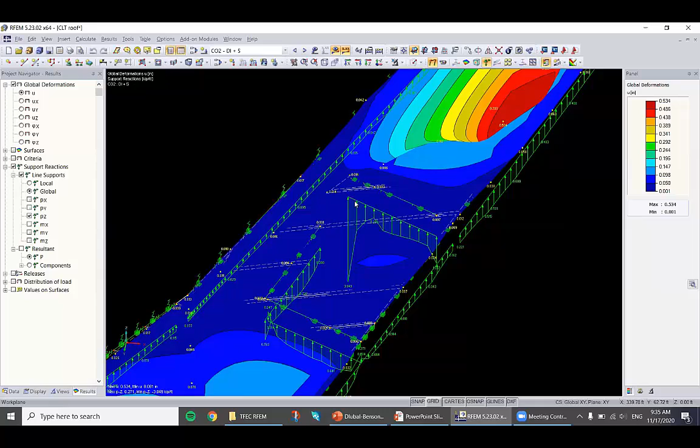This is the dead load deflection. The dead load and snow deflection is 1/2 inch, and then so you would expect these load spikes here, and there certainly would be more analysis necessary to look into those locations. I'm very happy to hear that there is an average region available now. I did not know about this, but that is definitely something that will help a great deal resolving situations like that.

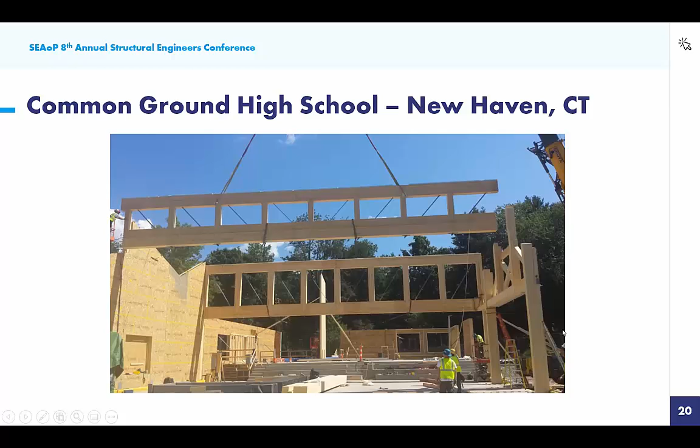This is one of the CLT applications. So what you're looking at here, this is a CLT panel, and then those are I-joists. It's a very long span, and neither the I-joist nor the CLT by its own could span that far, but combined, it was possible to span that distance. You can see there's a lot of screws in here to create a shear connection.

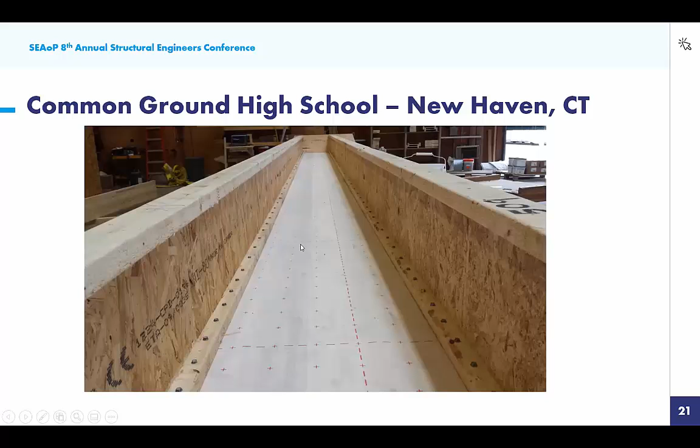Unfortunately, at the time, we did not have RFEM yet, and so there was a lot of hand calculations and probably some extra screws to be on the safe side. With a software like RFEM, this could be done much easier, and deflection results are way more accurate doing this with an FE software.

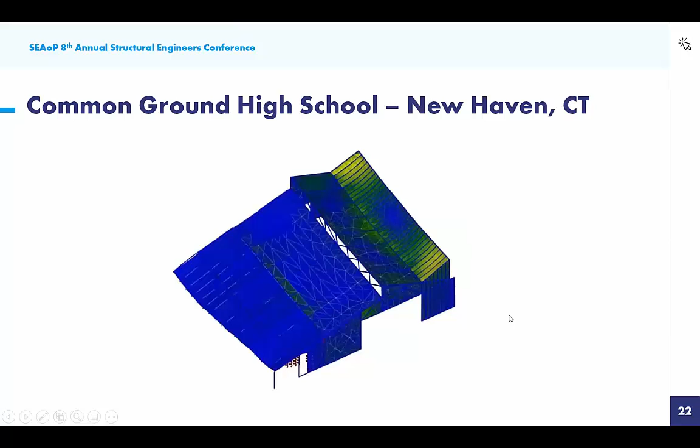This is the model that we used at the time. That's a visual analysis. We did again use some diaphragm action here to hold up the roof. It was not quite as extensive as on the North Fork project, and in this case it was only sheathing, like 5/8 or 7/8 OSB, and it would have been better to have a program like RFEM to really get the full potential out of the mass timber.

One other thing I wanted to mention about this project is that the elevator shaft was built out of CLT as well, which has a couple of advantages. It's not always possible to get the fire rating out of the CLT as needed for an elevator shaft. I think in this case as well, gyp cladding was necessary to get to code, but we still think it is a good investment to use CLT for something like that.

One reason being is material consistency. There's a lot less coordination necessary, fewer trades on the job site, and whoever builds the rest of the structure can provide the elevator shaft as well, resulting in much faster installation time. And of course, there is the advantage of carbon sequestration, as we all know, CMU, or really any other building material produces carbon, whereas wood stores carbon.